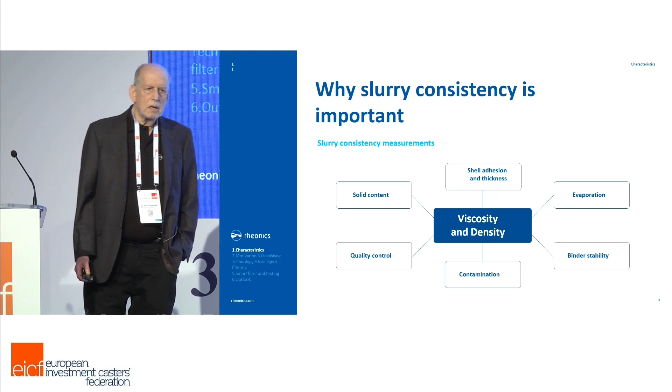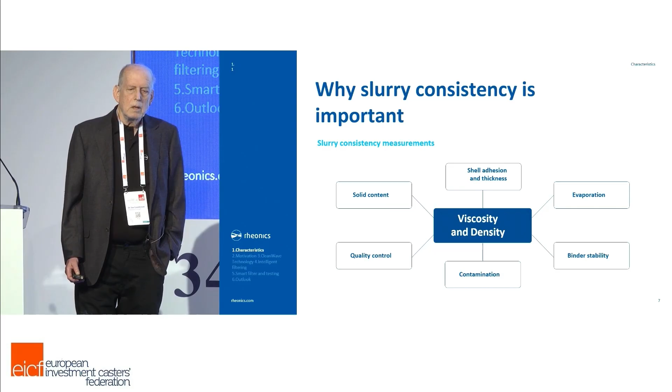Then there's also the questions about binder stability. What's happening in that tank? Is the colloidal silica binder beginning to gel? How can we detect that and correct for it before things get out of hand?

So these are the current options for measuring slurry properties. You have efflux cups, where you just time how fast the slurry drains out of a cup with a certain volume and a certain opening size. And for measuring density, in the middle there, you have a standardized container that has a certain volume of slurry in it.

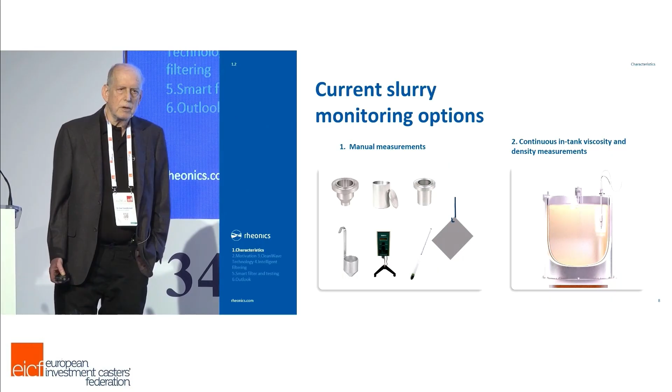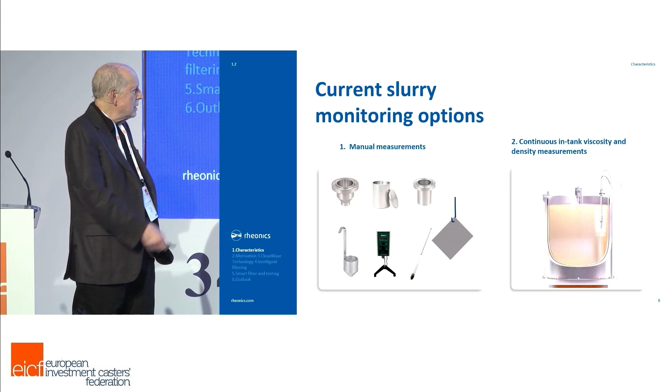You know how much the container weighs, and then you weigh it full of slurry, and you can calculate the density from that. There are a few different kinds of cups there, and you also see a Brookfield style viscometer, which is a laboratory instrument, and a hydrometer. The last one: you have a standardized plate, you dip it in the slurry, you measure its weight afterwards, and that's the plate weight.

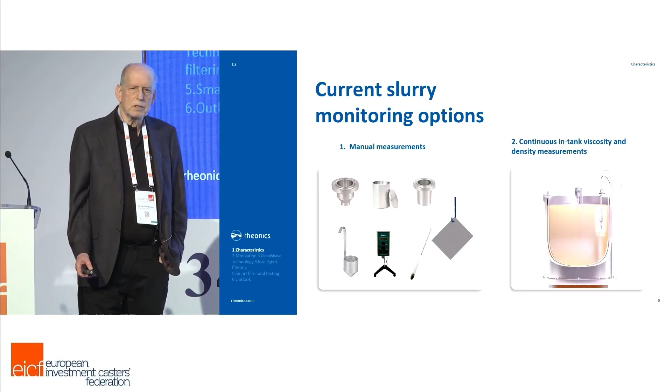It's about how much solids material is being left behind. So another option, which has become more popular, is continuous in-tank viscosity and density measurement. There you do away with all the manual point measurements that require sampling of the material, and you measure it in situ as the tank is being mixed, so presumably this will better represent the condition of the slurry as it's being used.

So what are some of the problems with existing methods? Aside from the intermittent nature of cup measurements, interoperator reliability is not so great. There have been studies done, and it's been found that experienced operators can get very consistent and confident results, but others get more random results doing measurements on the same slurry at different times.

Also, they're all intermittent operations. They have to be done at a certain interval. Whether they actually get done depends again on the operator. And they're time-consuming and messy. You've got to clean that cup, and you have to be sure that the aperture on the cup is really the size it was meant to be. Otherwise, you get distorted readings.

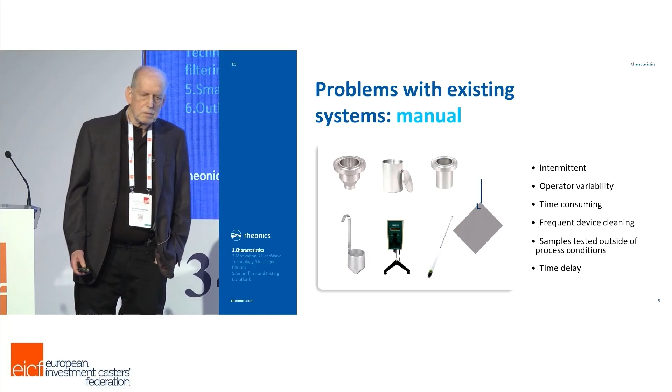But despite that, there are some advantages to traditional methods. In the world of manual operations and analog viewpoint, let's say, you could look at these manual methods as the operator's instruments. They're instruments that the operator knows. They know how to produce good shells given the limits of these methods, but they can rely on them.

And the fact that they can produce good shells despite the so-called primitive nature of these methods means they have a great deal of value. So when we present a new method for measuring viscosity and density, it had better measure up to the old methods. We can't just invent a whole new system and expect that that's going to address the operator's needs.

So what's the motivation for improving these systems? What are the advantages and limitations of in-tank slurry measurements? As we said, you get continuous measurements, and they produce digital outputs that are compatible with enterprise data systems, and all operators get about the same results with them.

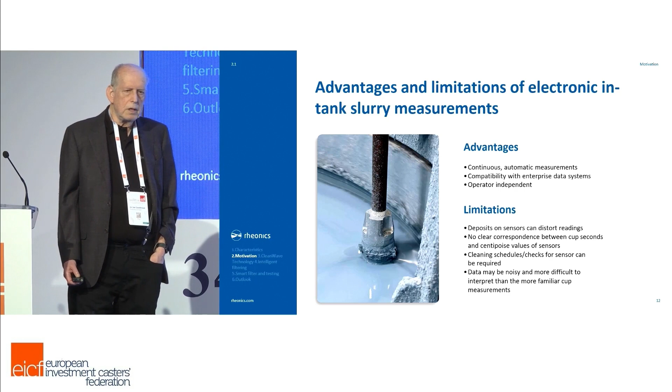So here's what happens typically. If you put one of our sensors in a slurry tank without attending to the cleaning or anything like that, in this case, over a time of several days, a deposit can build up on the sensor. Our sensors operate by having a very tiny vibration that goes on in the tip of the sensor. By measuring the characteristics of that vibration, that gives us information about the slurry properties. But if you get solids depositing on that resonator, the tip of the sensor, it distorts the readings.

The operator says, oh, we've got evaporation. This is something that will typically happen over the weekend, for instance. And the operator says, oh, the viscosity is rising, we have to dilute the slurry. But the viscosity hasn't been rising. There's been deposits forming on the sensor, which means that if you dilute at that point, you have an over-diluted slurry tank and you've got other problems to solve.

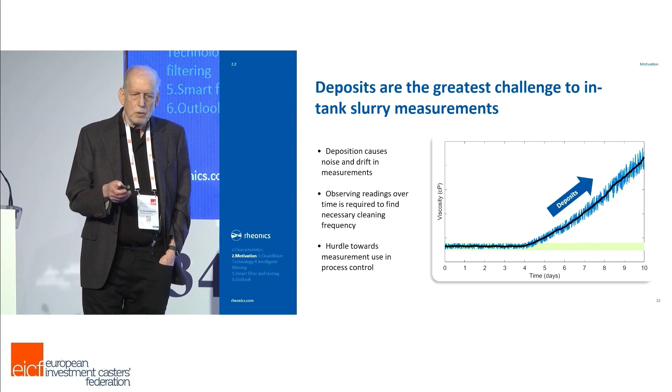So this is one of the prime factors that motivated our next development. So the next development, which some of you saw presented last year, is the self-cleaning CleanWave technology. Have you ever seen a wet dog trying to dry itself off?

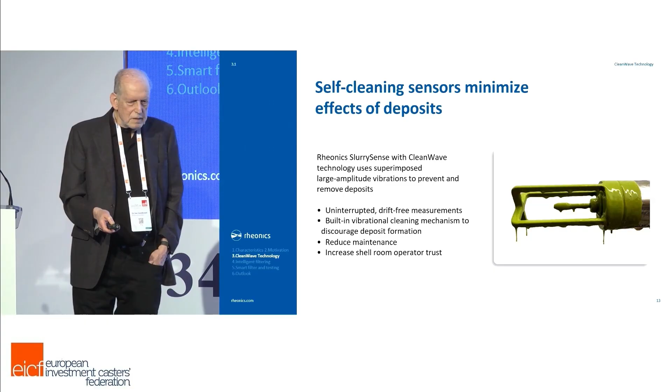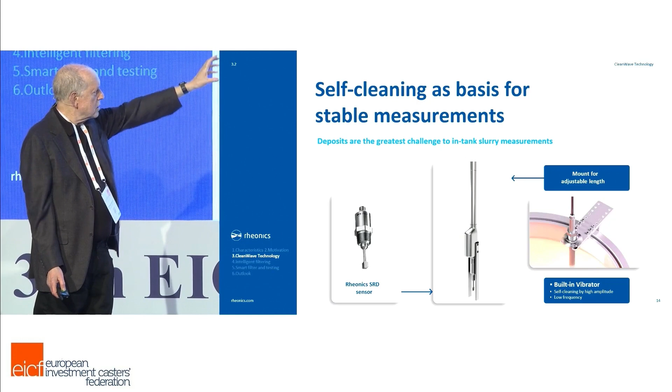So you start on the left, you see our SRD sensor. This is our viscosity and density sensor. That's the little tip there that is vibrating at high frequencies. And we added, in the second picture there, this little lump on the side of the stem, and that contains a pneumatically actuated vibrator.

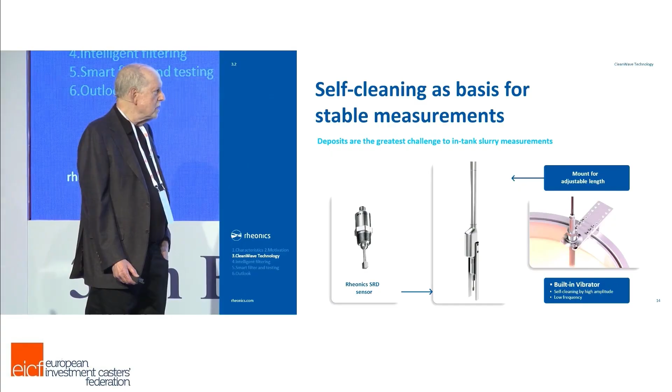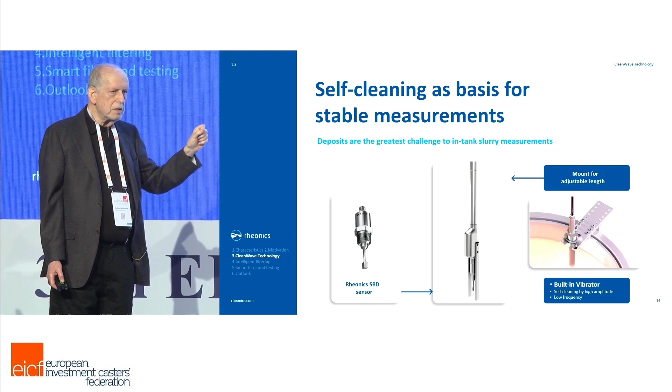What that does is it shakes the dickens out of the tip of the sensor. The whole thing vibrates, but at a much lower frequency than the frequency of the actual measurement vibration. So the result is that you can actually leave that vibrator running while the sensor is making measurements, and I'll show you in a moment what the consequences of that are.

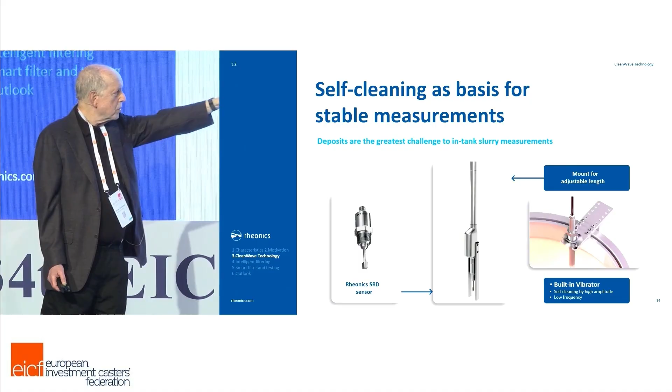So in the last picture there, you see the SlurrySense sensor, the probe with its attached pneumatic vibrator on the tank mount adapter. So it can be mounted on the side of a slurry tank.

So what happens here? We have a little model slurry tank. I don't know if you want to know about our model slurry tank that's only 7 liters but simulates a big one, talk to me after the talk. So we have our model slurry tank, we have different slurries, and we know that some of them are much noisier than others. There are some you can put the thing in, it stays clean, it's no problem. Others are full of little particles and stuff.

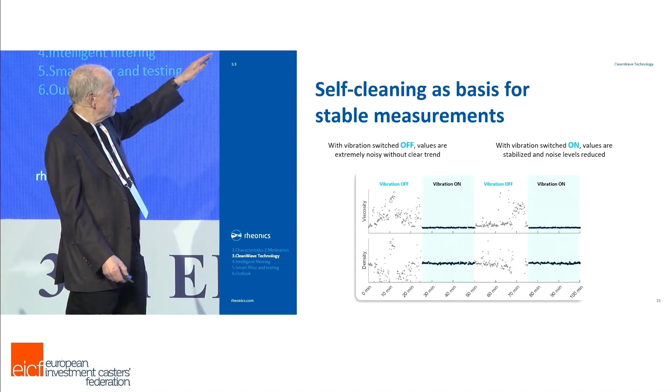So what happens is almost immediately after you put the sensor into the noisy slurry, you get what looks like random readings out of it. And then you turn on the vibration, and wow, look what happens. Suddenly the trace evens out, and it's almost horizontal. It stays that way until you turn the vibration off, and then it becomes random again.

Now, the interesting thing is that if you compare the two periods where it's random, there's not much correlation between those two. So if you're trying to pull data from the sensor without the vibration turned on, you're not going to get anything that's confidence-inspiring.

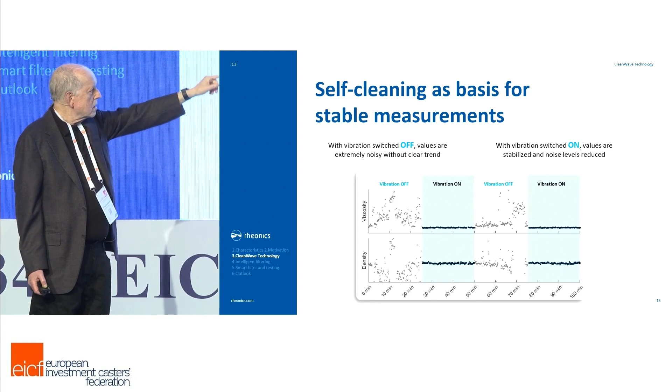On the other hand, after another 30 minutes or so, you turn the vibrator on again, so it's had 30 minutes of being in this rotating model slurry tank, and almost immediately it jumps back to the former level where it was before we turned off the vibration. And this is true of both the viscosity and the density.

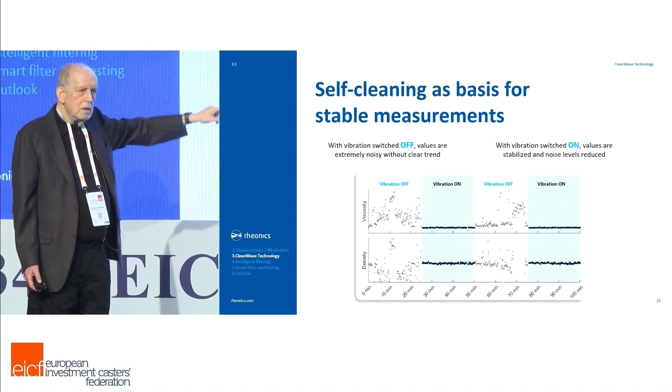So this is the first level of cleaning up the trace so that it becomes intelligible to somebody who's accustomed to cup measurements, for instance.

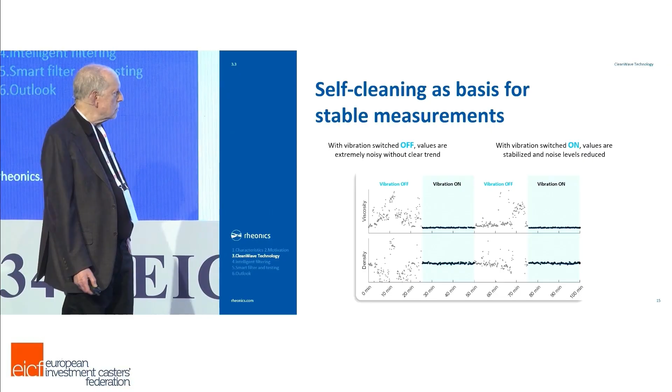So then, well, let me go back one thing here. Now, to us as sensor makers, we think, wow, that's incredible, look what it does. However, if you give it to somebody who has to make decisions based on the output of the sensor, when you look at these, there's still noise there. There are still things that are going up and down. Which one do I choose?

To a certain extent, people will develop a sense of what the constant portion of that is, but a slurry tank operator should not have to be a measurement engineer. They should be doing the best shells that they can possibly do.

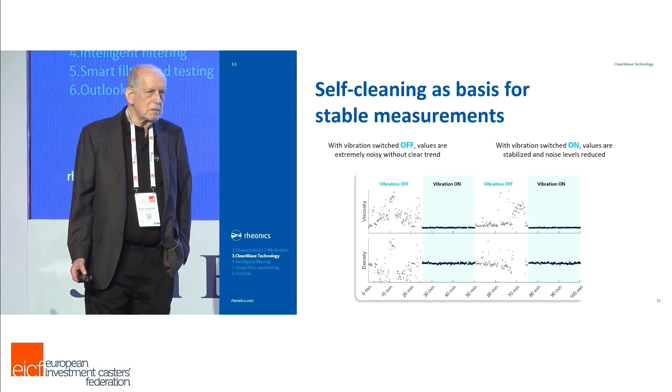So let's take a look at what you can do about that residual noise to raise the confidence level in the measurements. Whoops, wrong button. That doesn't raise confidence. Let's see.

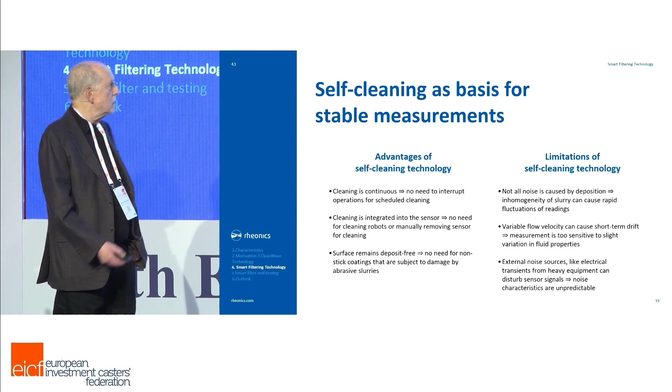So the advantages of self-cleaning are continuous operation. There's no need to interrupt the operating cycle of the tank, and the surface remains free of deposits.

The limitation is that not all noise is caused by deposition. You can have, for instance, little chunks of residual shell material floating or rotating around in the tank that cause rapid fluctuations of the reading, or impact with the sensor element.

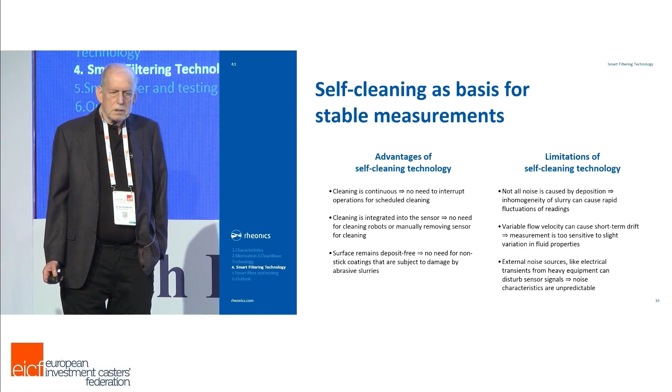Variable flow velocity can also create local variations in the readings. In other words, our sensor might be a bit too sensitive and too quick to respond to really reflect the bulk properties of the slurry, and the bulk properties are what ultimately the caster is interested in.

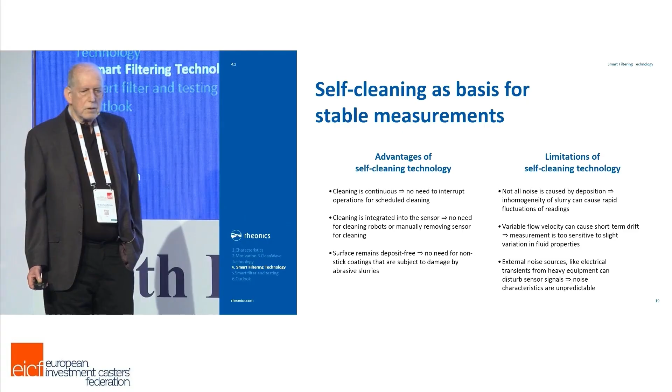And finally, you could have external noise sources like electrical transients from heavy machinery in the neighborhood, which would give unpredictable noise. So you think to yourself, okay, if I'm a measurements engineer and I see a noisy signal, let's put an average value filter on it—a slow, low-pass filter—and take the mean value.

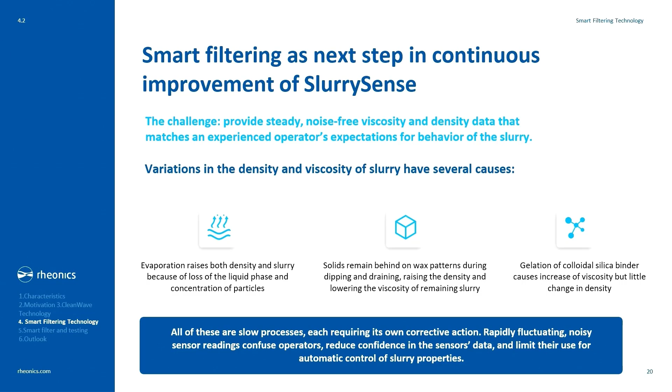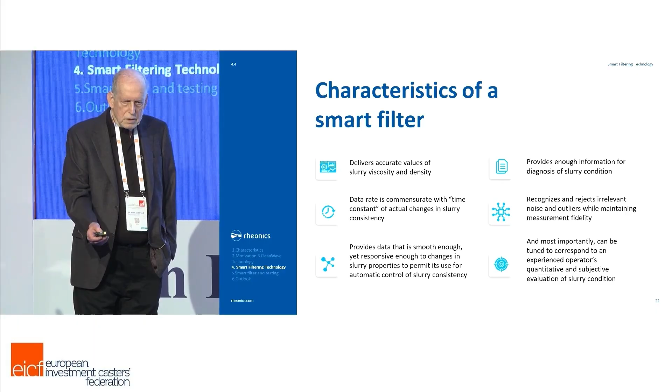Unfortunately, we tried that, and it doesn't work very well. The reason is—I'm going to skip over these and get to the meat and potatoes here.

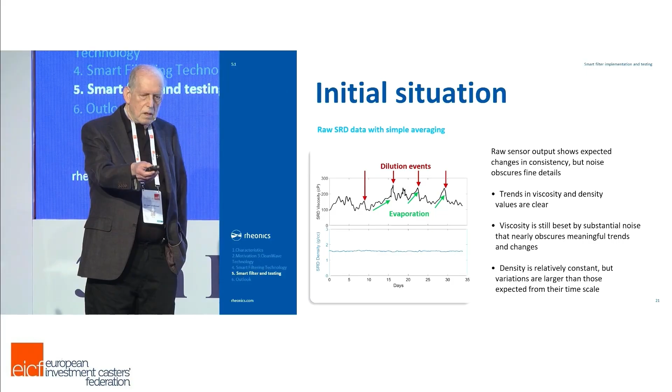Here's a situation where you have a trace of the output of our sensor. You see the viscosity measurements are bouncing around a bit, and then they gradually rise, and the operator dilutes the slurry. Sure enough, the value falls. That happens on repeated dilution events, so an operator can learn to filter that with their eye.

They can say, okay, this looks like rising viscosity. Yes, this was over the weekend, the tank was rotating, it's been hot in the plant. Seems reasonable to dilute it there.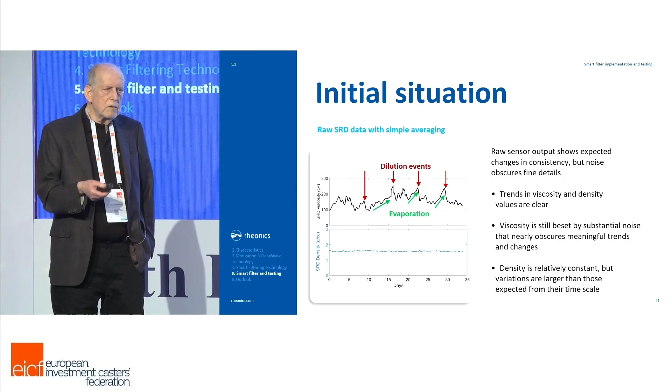But if we try to apply a low-pass filter to this, it doesn't work very well, because a lot of the excursions are in one direction. Like if the primary source of noise is that you're getting bombardment of the sensor by little particles of residual shell in the fluid, then they're all going to be in one direction.

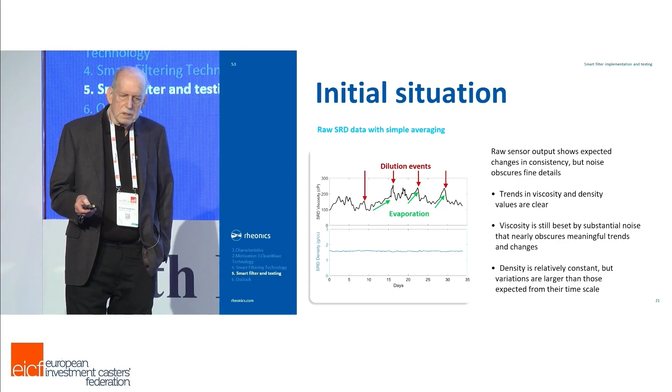And like the squeaky wheel that needs the oil, they're going to be overemphasized in a simple low-pass or mean filter process. So let's take a look at what we can do with smart filtering.

Just a word about smart filtering before we get to the data. Let's say I have a slurry tank that's got 100 or 1,000 liters of slurry in it, and I take a cup with a liter of water and dump it into that tank, and the tank is mixing, it's rotating.

How long do you think it's going to take before you get a uniform mixture of that one liter into the tank? It's going to take a while—at least several minutes to really make a tiny difference in the viscosity of that slurry.

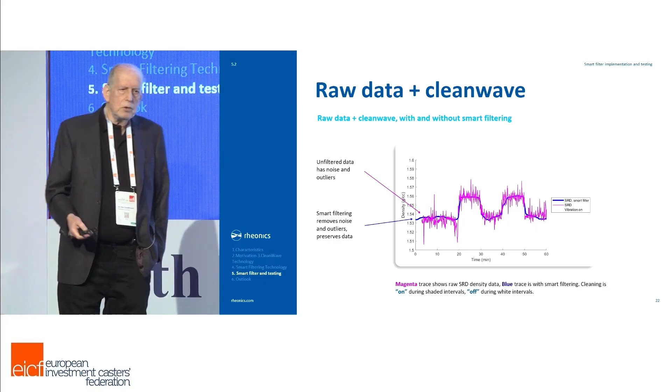So if you have a slow rise in viscosity due to evaporation, for instance, because you've got a hot climate in your room, then the noise you see—if you're an experienced operator, you know that noise cannot be happening because the slurry properties are changing that fast. Now, they could be changing locally very fast around the sensor, but that's not what's important.

You get this big paddle tree dipped into this thing—it doesn't care about the micro variations in the density and viscosity in the neighborhood of your sensor. So a smart sensor or a smart filter has to somehow emulate the eye of the operator and the knowledge of the operator.

And the operator knows that whatever that sensor is putting out, if it's got variations over the course of a minute or two, they cannot be relevant to the actual bulk properties of the material. So the challenge for a smart filter is to produce a filter algorithm capable of recognizing long-term trends and tailoring that to the properties of the process.

So for instance, I'm going to use the term time constant. If you know that you throw a bunch of water in your tank and you get a response over a certain length of time, I'm going to call that something like the time constant of your tank.

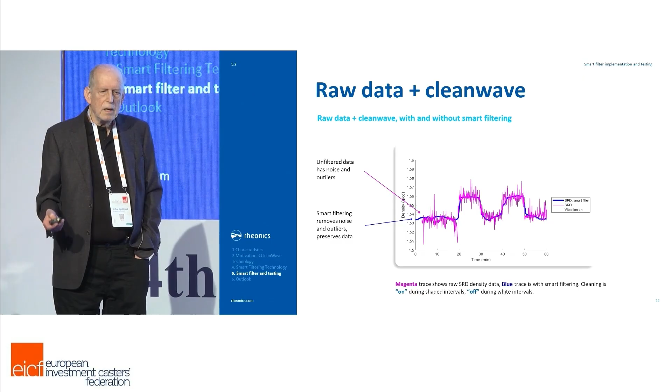If you have variations in the sensor output that are much faster than that, you know automatically that they're not relevant. So a smart filter will know in advance what the time properties of the slurry tank are, and will compensate for that without being overly influenced by outliers.

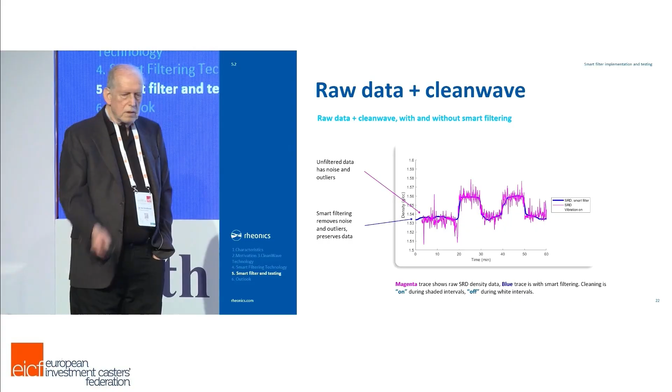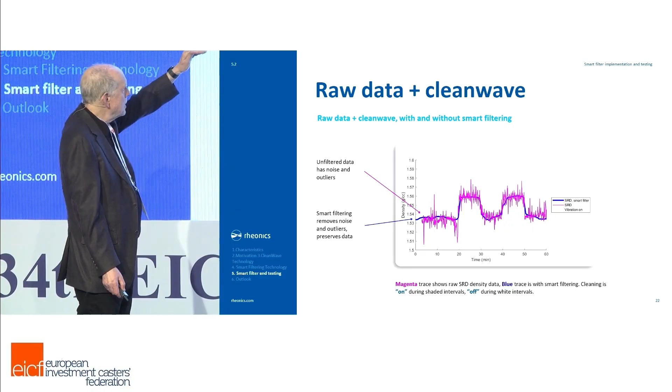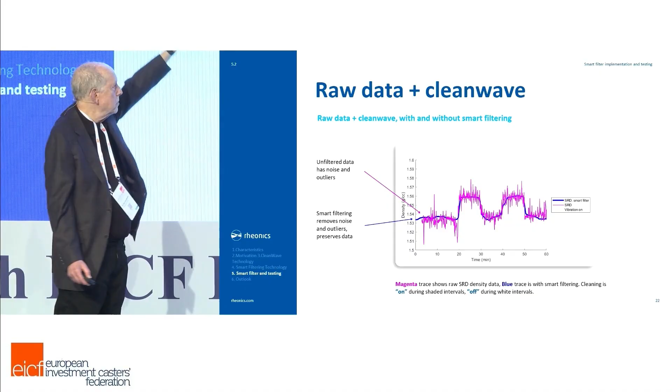In this trace, the magenta trace is raw data coming out of an SRD, over the course of minutes. The first interval is biased toward negative values. They're outliers. Whatever their source, they're going down more than up. So you want to be careful that a mean value would be underestimating the density because it would be pulled down by those outliers.

The second interval is where you've got the vibration turned on. The interesting thing is that it's a bit more symmetrical, but still there are these outliers that can always influence the bias. They can bias the output.

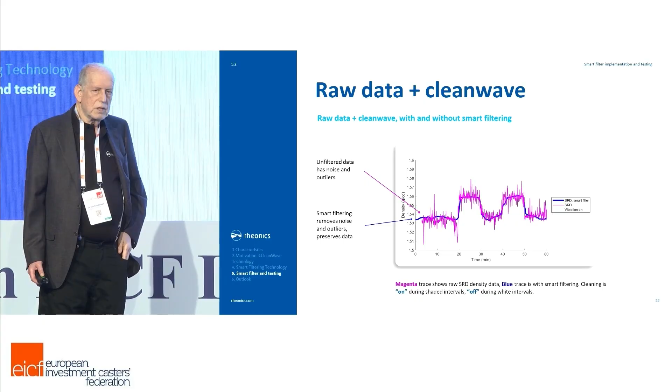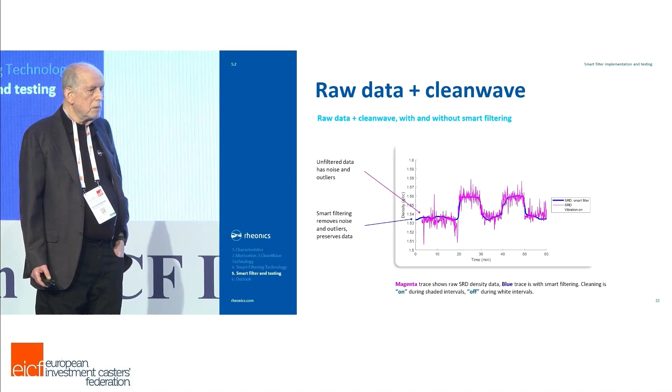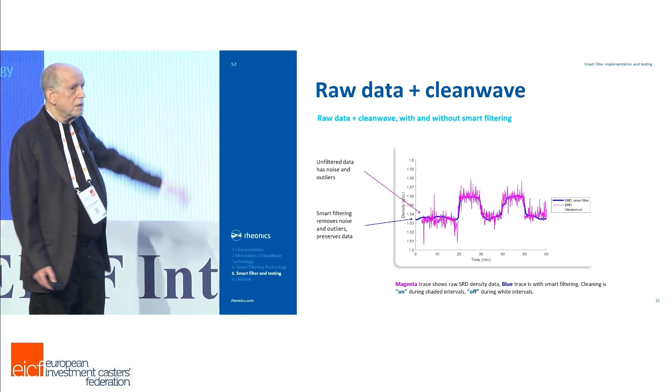The blue trace is a filter that takes into account the time constant of the slurry tank, plus it removes the outliers that can bias the bulk properties. So what you're seeing with the blue line is a much fairer estimate of the bulk properties of the slurry that are actually relevant to the casting process. Those may look like big excursions, but the vertical axis is about 0.01 grams per cc, or kilograms per liter of density. So that's pretty constant, pretty clean data.

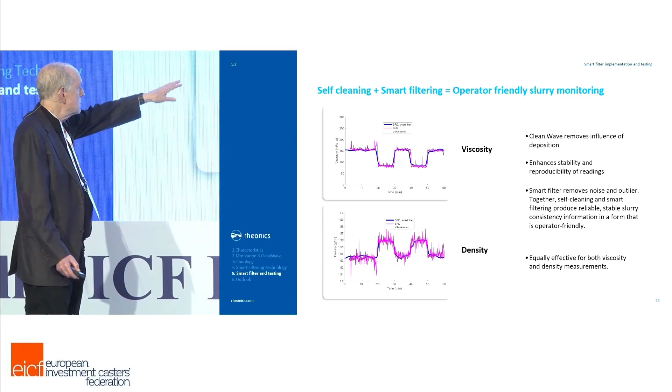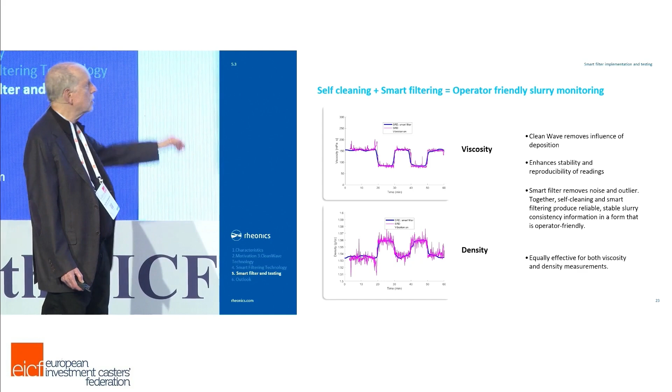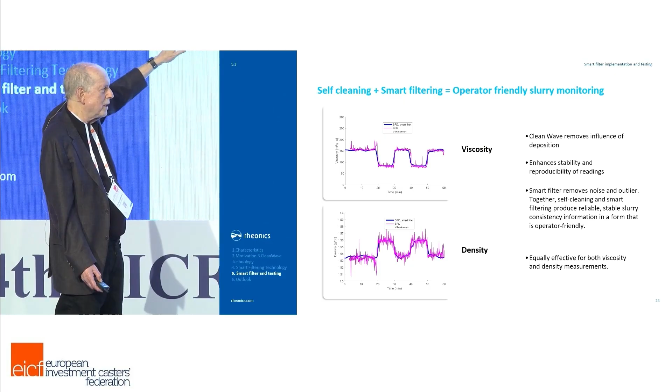Here's another example. This is our density measurement, and that's our viscosity measurement up there. In viscosity, you see that the positive outliers tend to outweigh - there are fewer negative outliers than positive outliers. So without our smart filtering algorithm, that would pull the viscosity upward unfairly. If you look at it without the blue line, you can see that the blue line ignores the outliers.

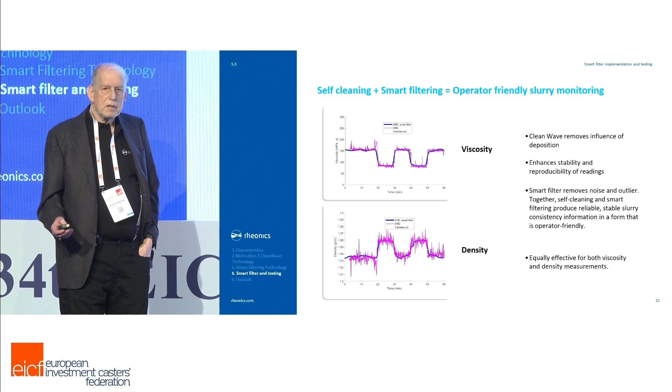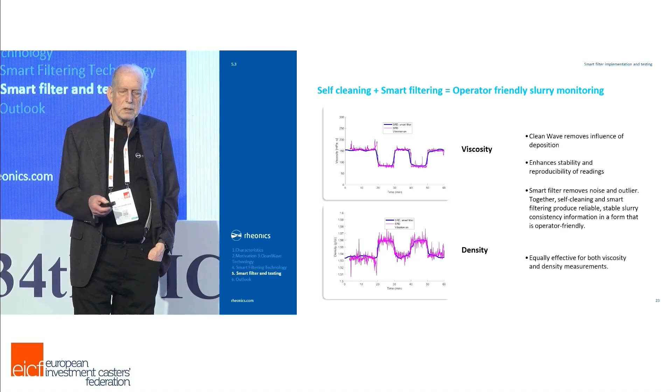So this is one of the central functions, two functions of a smart filter. One is it shouldn't be distracted by irrelevant data, and its time constant should reflect the realistic physical time constant of the slurry tank. Here we're moving closer to something that mirrors the experience of the experienced operator.

I think we dealt with this already - this is just a recap of what I mentioned. It looks at the values with an experienced operator's eye. I think that's the most important thing, and to do that requires consulting with experienced operators. In the area of knowledge transfer, I think this is one of the central things.

That was certainly one of the things that reoriented our own attitude toward our measuring systems, because it helped us realize that we were trying to solve a real problem without full knowledge of what was required for that. So it required dynamic interactions with many shell room operators from whom we had to learn. We started out thinking they had to learn from us how to use our sensor to better their operations. We wound up learning at least as much from them as we expected them to learn from us.

I think if we forget this, it's very easy to revert to the idea, hey guys, we're giving you a new tool, it's bright and shiny, and you just got to learn how to use it. Partially true. We have to learn from experienced people and not try to behave as though we're investment casting experts. We're sensors experts. So what's the outlook for this?

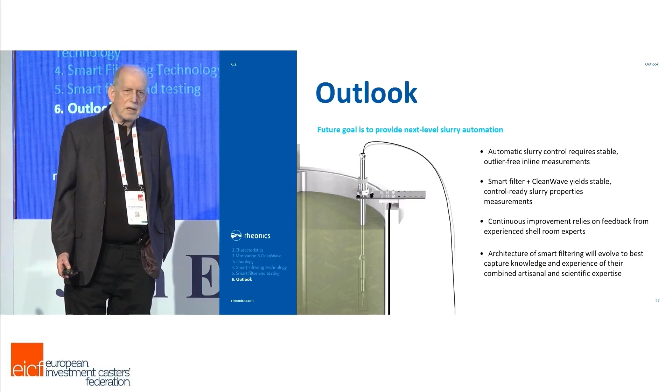We've just been talking about human operators adjusting slurry tanks. Of course, one of the goals of all of this is to provide totally automatic control over slurry consistency. So in order to do that, you need relatively clean data. If you supply a control system with data that's got a lot of ups and downs in it, it's going to create trouble. It's going to try to make corrections where no corrections are due, and it's going to neglect making corrections where they are due. So the two things have to work together.

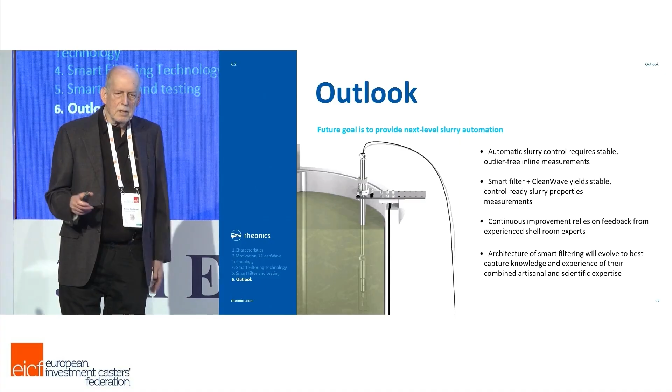In other words, now you have, in essence, three components. You have the operator's experience, you have the control system that you want to take over the least creative task from the operators, and you have the measurement system. And the three of those have to cooperate on defining what is proper operation of a slurry tank and how that's reflected in the sensor output in order to design the proper smart filter.

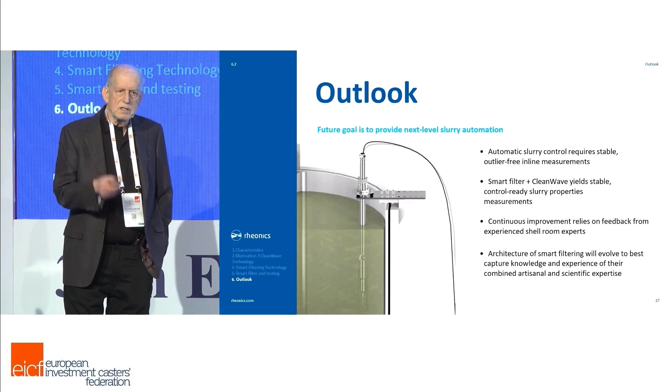And that could change. It could be that for one type of slurry you need one sort of filter, for another type of slurry you need another sort of filter, or you need a filter that can actually detect what slurry is in that tank and make the appropriate corrections.

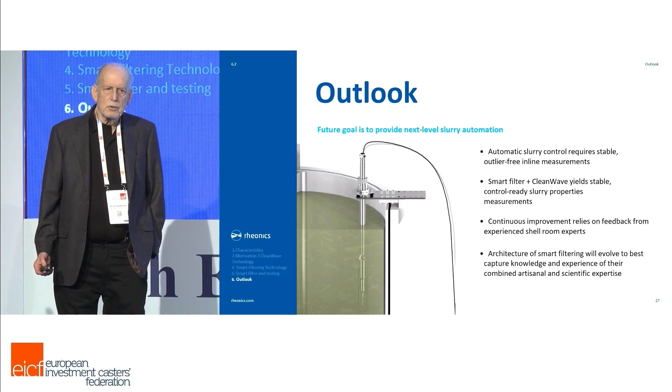And I think from the human standpoint, continuous improvement relies on feedback from experienced shell room experts. I think that's the biggest channel that we need to keep open, and in a way it's the most challenging, because to have somebody take the trouble to install the sensor in their tank is not trivial. They have to interrupt operations perhaps. But a lot of people have tried it, and a lot of people have been interested enough in it to share their data with us, and that's been very helpful in moving this whole project forward.

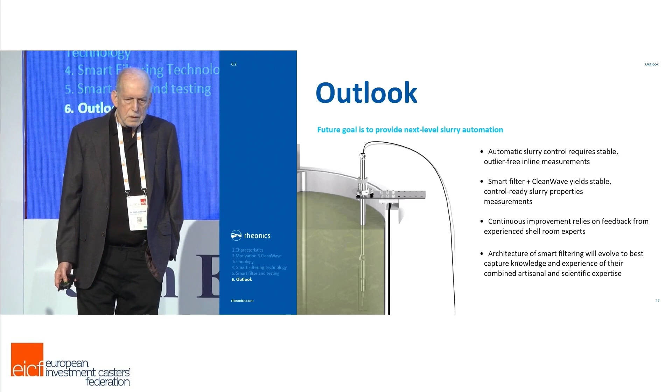So that's it. That's basically what we have to offer today, and I'm happy to answer any questions that might come up around that.

Thanks a lot, sure, Joe. And of course, we see now if there are questions in the audience. I did not want to stop you, so no, that's good. Running a little bit long in time. Yeah, sorry about that. But I see there are some questions already coming.

Yes, thank you for your presentation. Very interesting. I've got actually two short questions. I'm right here, I can't see a thing. I'm here, I'll wave. Okay.

Your research results incorporate a pretty low density backup slurry of about 1.5 to 1.6 grams per milliliter. What results did you achieve with a much heavier prime slurry of about 3 grams per milliliter? I haven't been directly involved in these tests, but Sunil or Daniel, maybe you could say something to that.

Sure. So basically, the SRD density platform goes up to 4 grams per cc, drilling mud and stuff like that. So in terms of the same measurement, the higher densities, we have not seen any big issues. It's slightly harder to deal with them in our own labs, so that's why the data you see from us, which we can share, tends to have the lower densities at 1.5 and stuff, but the customers have been working with much higher densities.